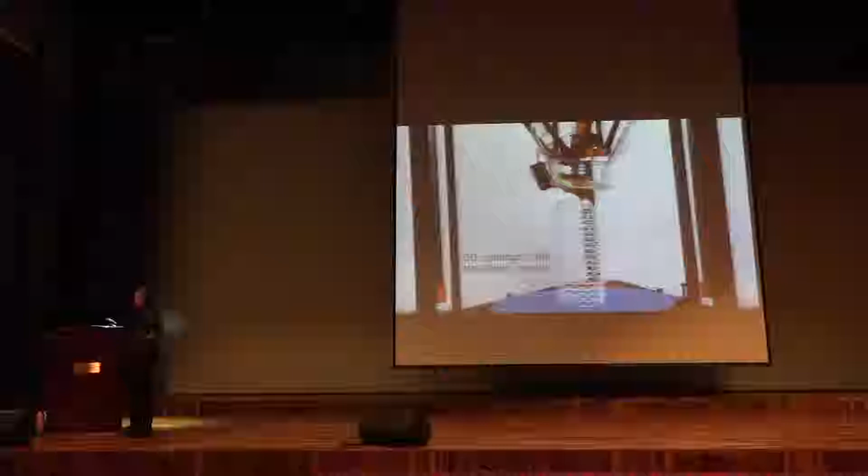All right, so here's a little teaser. This is one of the things I'll show you. We've been working on different software and hardware techniques that allow us to use 3D printers and laser cutters in more efficient ways. All right, there we go. And I need to push this button here. All right, so I'm actually kind of curious.

How many of you ever used a 3D printer? Okay, wow, great, that's like a third of you. Fantastic. So for those of you who haven't done this, it's very, very simple. Today, there's a good amount of machinery out there that allows you to make things under computer control.

A milling machine, a little more messy, used less often, is a subtractive tool, removes material. 3D printers are additive, so essentially it starts with zero and builds up the object. And laser cutters, kind of almost my favorite, also remove material, cutting it up into different parts.

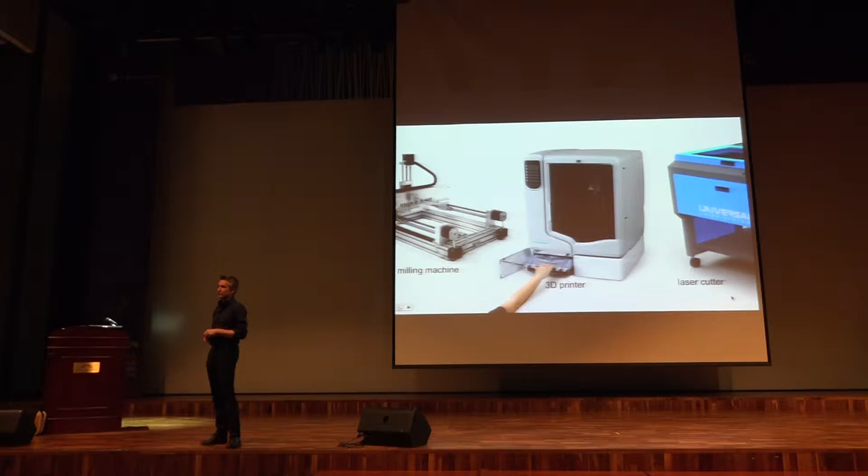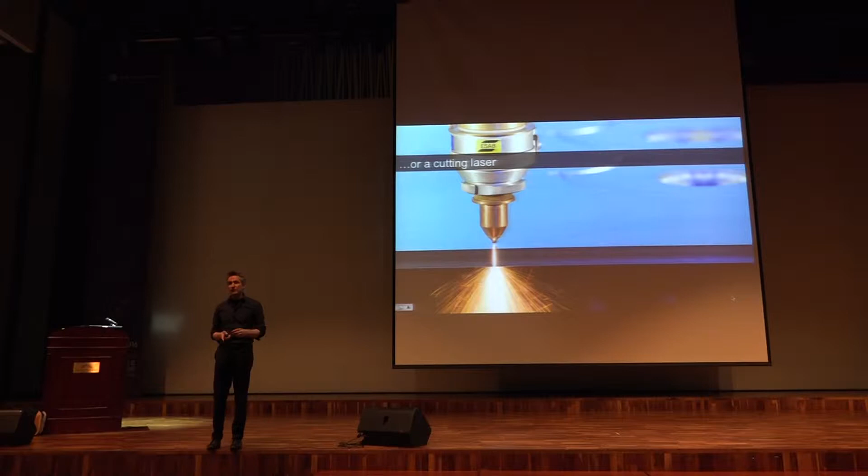If you think about how they implement it, there's a lot of different ways, but essentially you have some sort of robotic thing, like an XYZ table, some construction that allows you to place a tool in 3D space. Could look like this. And then at the end of this, you mount either a drill, called a milling machine, or a glue gun, kind of the same hot glue gun you maybe used in kindergarten, or a cutting laser, and then you've made a new fabrication tool. There's lots of other ways of implementing this as well.

So I think this is really going to change the world, and let me try to tell you why I think that is. Traditionally, when you're having a mechanical problem, you have a mechanical solution for it. So let me show you an example of how this works. I want to make a copy of something, and what I do is I get myself an analog copy machine. So let me show you an analog copy machine. I don't know if you ever did this, if you lost your keys. I certainly have.

So this is the actual original key that you have, and this is a blank key. It looks the same, but it does not have the pattern in the beard. So you put them both into the machine. Let me give you some sound of this thing. It sounds like this.

What happens now is this side here is sort of a scanner. You push this into the key, and at the same time you're cutting on the other side, getting a direct copy from one to the other. I'm sure if you're anything like me, you've lost a bunch of keys in your life. So this is a mechanical tool that creates a mechanical solution for a mechanical problem, but it's an analog solution, and it requires a highly specialized machine. All this thing does is copy keys, actually just a certain subset of keys.

Now, how this is changing today is we're moving to a digital model. So instead of directly making a copy, you actually first 3D scan the object, then you do everything you need to do digitally, and then you reprint it, and you get this out. You might have seen this type of process before.

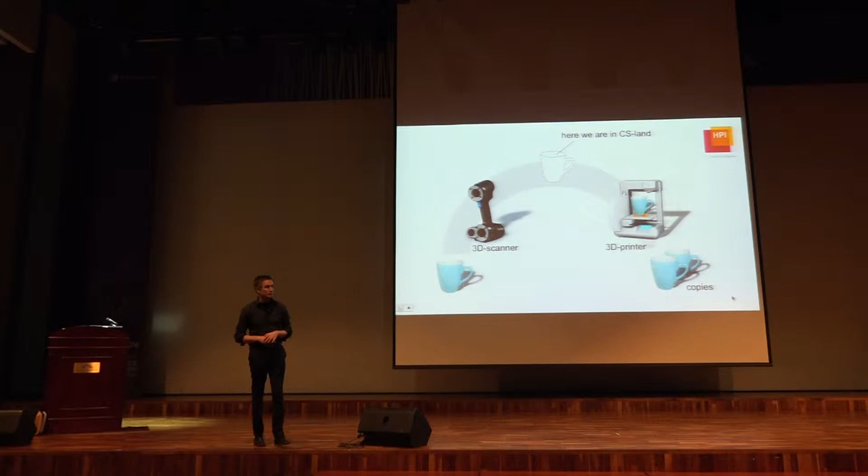Without this digital cup, I would have exactly what I had before. But this digital cup is very interesting because now we're in computer science land. This digital cup goes a long way, and we're going to talk about sharing on BitTorrent and all the things that can happen to the cup. So it enables completely new workflows.

Here's one example. One of the early adopters is the car industry. If you're a proud owner of a 1974 Volkswagen Golf, and if you happen to bump into that bumper—again, if you're anything like me, you damage the car periodically—you might want to get a replacement part of this thing. For Volkswagen, that's actually a difficult challenge.

They need to have that part available. So when you order the part, it's going to get shipped from a very remote location, maybe Wolfsburg, Germany. Someone's going to package this up and send it to you. And you're going to pay, I don't know, $150 or something for a piece of plastic. You're like, what? Why is this so expensive?

Well, the reason is that Volkswagen isn't interested—it's a lot of effort for them to maintain every single part of every single model they ever made. And this is actually one of the things where fabrication can come in.

Rather than holding on to these legacy parts and producing them in small quantities when you need them, you can actually just store the digital model and produce them on demand when you need them. Then in a slightly more distant future, this model could actually go to a fab lab close to you—rather than getting it from Wolfsburg, you could get it from the local fab lab in Seoul or wherever you are.

And in some even more distant future, this model could actually come to you. You have the 3D printer at home, the model is sent to you, and while you're still under the car fixing things, it actually 3D prints, and you can insert it into your car and finish things the same day for much less money. So it's one of the potentials, and the solution I just described to you is a classic database solution.

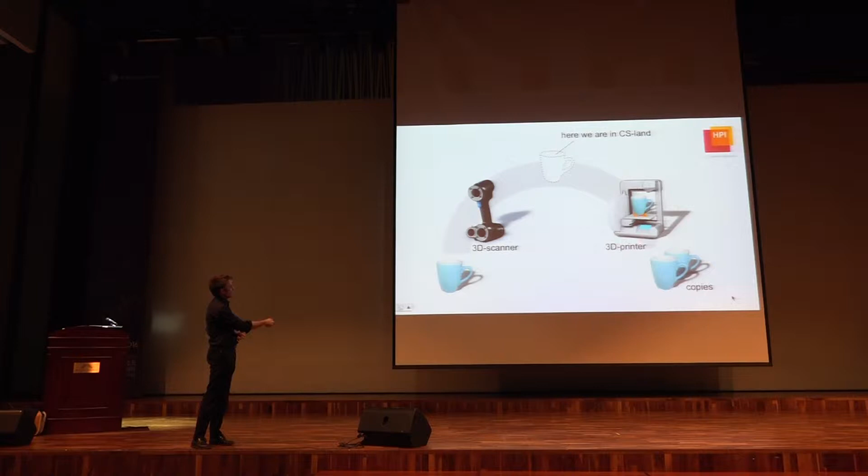Let me show you the pattern again. Here's this pattern: there's some sort of a scanner, and you've got a printer. You stick in an object, you convert it to digital, and then you convert it back to analog.

Let me show you this pattern in the past. You may remember this one. Desktop publishing became really big in the 80s. Before this, people would make layouts by actually using paper and paper clips, and when you're submitting something to a conference, they wanted a camera ready version. That's because there used to be a camera when they made that ready version of their talk. Today, obviously, there's no camera ready, there's no camera involved anymore, but it used to be.

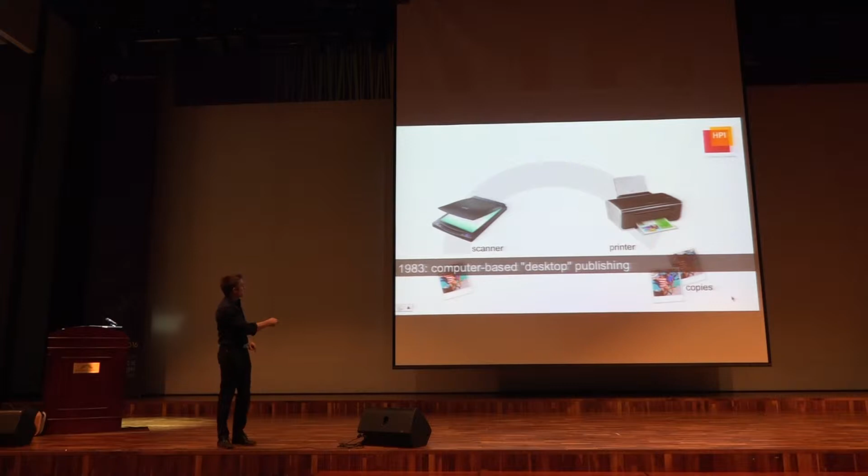At the time when scanners and printers were available, you could solve everything you needed to solve in computer science land. That's exactly what happens when you're submitting a publication to this venue here. I'm sure there was no camera involved in that after that.

Here's a different version of that pattern: music production. It was analog. You had an LP, maybe you still have some LPs, but it became all digital, and in between you had digital distribution. That's kind of why we have Apple the way we have it today. Apple became a media company because of this model. A lot of things changed.

One of my favorites: in the 1970s, a guy called Shoup at Xerox stole away time at night and did this. He used a tape recorder and ripped videotape onto a Xerox Alto, then they painted around in the picture, and wrote it back to the tape. People thought it was a tremendous waste of time. People threatened to fire him for wasting company property working on these things. But he actually got an Emmy Award years later because he invented video editing.

If you think back to when MTV actually had video clips, it created a whole new art form. And if you go further back, there are lots of instances of this pattern. You could even go back to interactive computer terminals. Before this, there was no interacting with computers. There was a way where you could type something in, and there was a printer on the other side, and somehow you closed the loop, and this made computer systems interactive.

So the pattern that we see in fabrication today, the presence of a printer and a matching scanner, is a pattern we've seen a lot in computer science, interactive computer science, and every single time we saw this pattern, big things happened. I think big things will happen again this time.

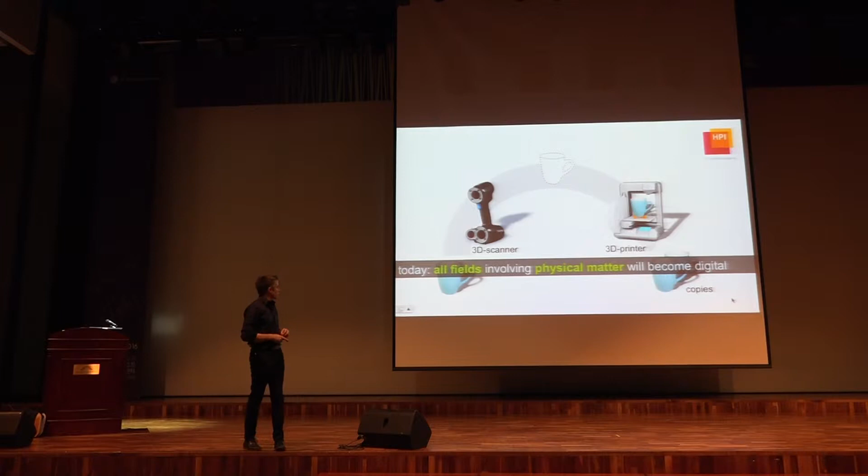What's interesting about 3D printing is it's certainly going to affect things. It's not just one field, it's all the fields that have to do with physical matter that are affected this way. Think of structural engineering, mechanical engineering—everyone who deals with physical matter today will be affected by this.

It's actually happening. Let me start with this one, I kind of like it. My student Stephanie dug up how many papers are submitted in HCI graphics conferences on this topic. This was until last year, and you can see there was nothing before 2011, and then the number of publications steadily ramped up. I was on the UIST program committee last time, and out of the 40 people on the committee, 6 said their primary interest is fabrication.

So it's really happening in a very big way. There's exponential growth in the maker scene. I like this web page here - they have 200 different 3D printer designs. Most of them are royalty free. You just look at the models, download them, and make your own 3D printer. A lot of things happening there - exponential growth in sales in 3D printing.

I think what's really interesting is that the industry is trying to address other people. So the first 3D printer I actually own is this one here, which cost $50,000. I guess that makes it something like 60 million won.

Then the next one I bought was a MakerBot for $3,000. Look at the huge price drop. This was intended for makers, so not professional users anymore, but people who just enjoy doing these things, hobbyists. Now there's a printer called Printrbot - this is the cheapest thing. I also don't necessarily recommend it, but it's interesting to see that this can still be done with less money than the previous ones. And so this raised the question if this could go out to consumers.

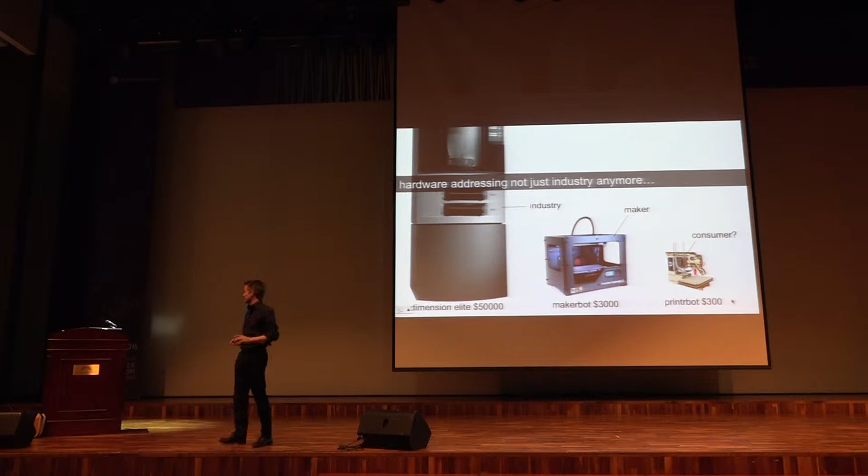So I think this is a great opportunity, and I think the great opportunity is to have millions of people make things.

So I think that's exciting because it depends on what people make. And I'm an engineer, and I would like them to engineer. I would like them to solve mechanical problems. I would like them to come together, make local adaptations of what they need for where they live, and I would like them to collaborate together in solving bigger problems.

I think there's good evidence in computer science where at the moment lots of, millions of people can work on the same problem together, that bigger problems are being solved. So this is something I'm really excited about.

I think the grand challenge is to let everyone solve mechanical problems, the same way that desktop publishing systems let everyone publish, and movie editing - I can edit movies on my cell phone today. I think we're going to see similar things for mechanical problems in the future. So now to get there, I think there's a bunch of different sub-challenges we have to solve.

There's still a lot of work in materials - I'm not going to talk about this today. I'm going to show a lot of work on interactivity. I think initially these machines were terrible batch processing systems. They still are - you work on them, you print them out, it doesn't work, you go back.

I think one of the key elements is adding domain knowledge when people want to make smart things. I don't know about you, but I know very little about desktop publishing, but I like the fact that I have a desktop publishing software that shows me how to do things. So that's very powerful - that's the key idea of a software system, that what you're lacking in skill, what I'm lacking in skill, the software system can actually add to us.

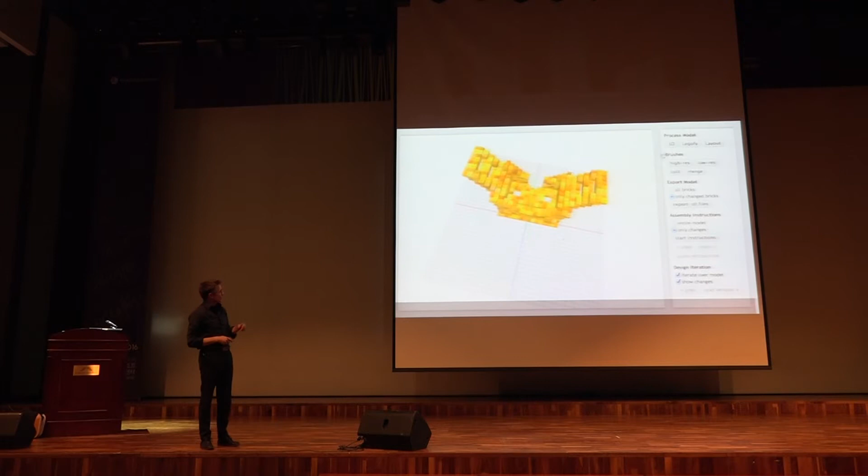So let me show you how this works. I load my 3D model into the Fabricator software and say Legofy, and it makes Legos out of them. In this case, I just want to check the optical path—this is a VR headset, and I want to make sure the lenses are in the right location. So I go back in and tell these areas around the lenses that they should be 3D printed, and everything else I'm okay with having in Legos.

So I export this as an STL file—that's the standard, terrible standard format for 3D printing. While one part is printing, I can sit down and actually assemble the rest of this thing. And when it's done, I've got my 3D printed parts—they fit in perfectly into the Lego setup. I pop them in, and I can start trying this out. It looks a little funny.

We're all going to wear these things in the future, believe me. All right, so I can continue to operate.

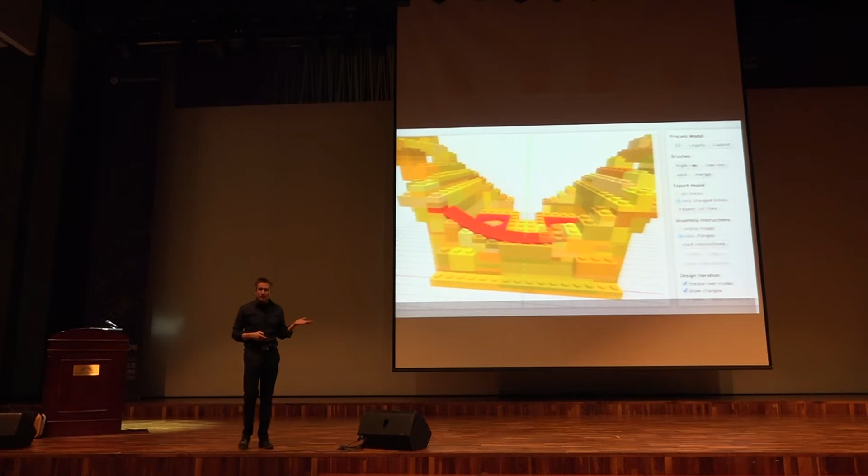Lego is highly modular, and as a designer, I would like a modular design. So now I can adjust the headpiece and so on, and it can go through my process a bunch of times. When I'm all done, I'm going to 3D print the whole thing, and I've saved a lot of time. I should update this.

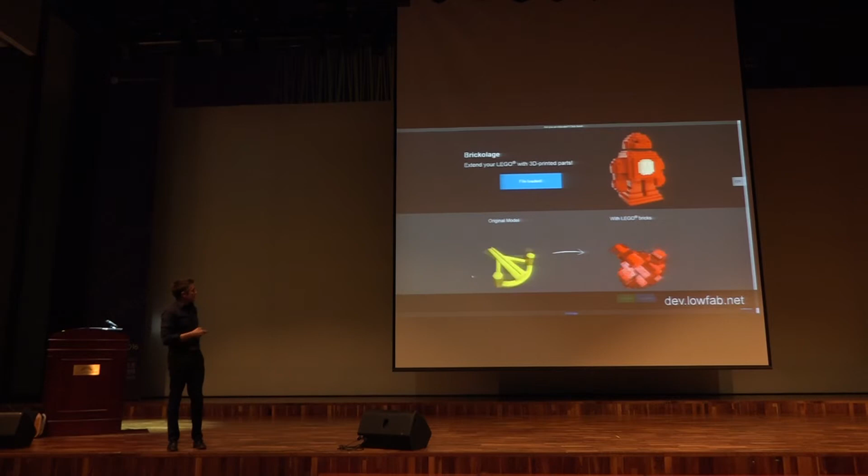We actually created a webpage called brickify.it. If you're interested, you can check this out. You can drop your own STL files in there, it converts them for you, and you can try out this process. In the software, you can tell the system what parts of the model you'd like to be Legos, and which parts you're happy with being 3D printed.

Legos were great because they were very modular. We also talked to the Stanford Teachers Association about using these in class, or in high school. Kids are very familiar with Legos, and it seemed like a really good approach.

But there were other applications where Legos didn't seem to fit that well, and one of them was ergonomic testing. If you're working for a company that makes a grip, like this old Logitech presenter, the size and shape of the grip is really important. These things are very carefully designed, for example, at companies like OXO.

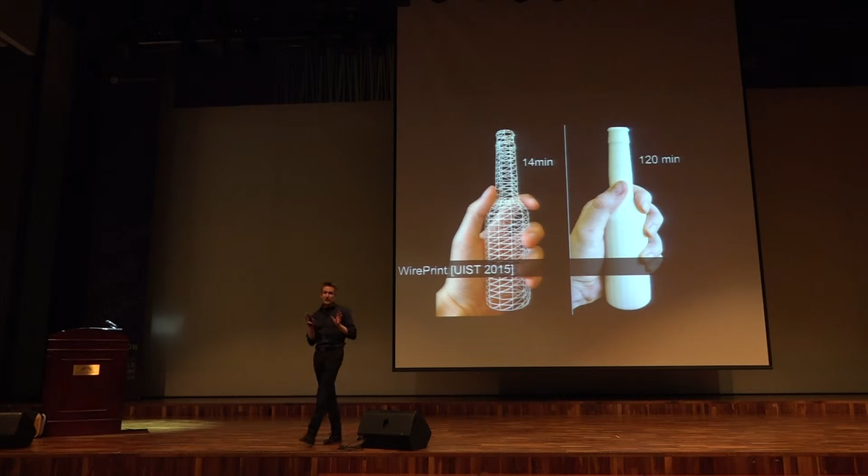So we wanted to have a low-fab version that actually captured more of the essence of the shape. This is what I showed you earlier, called WirePrint. Again, it's the same method as before. You can go in and say which parts of this you'd like to have high fidelity fabricated. In this case, this is a piece of a bunny. I can say I want this to be high fidelity and everything else low fidelity, and again I'm getting a speedup of something like a factor of 10.

Not quite that fast yet.

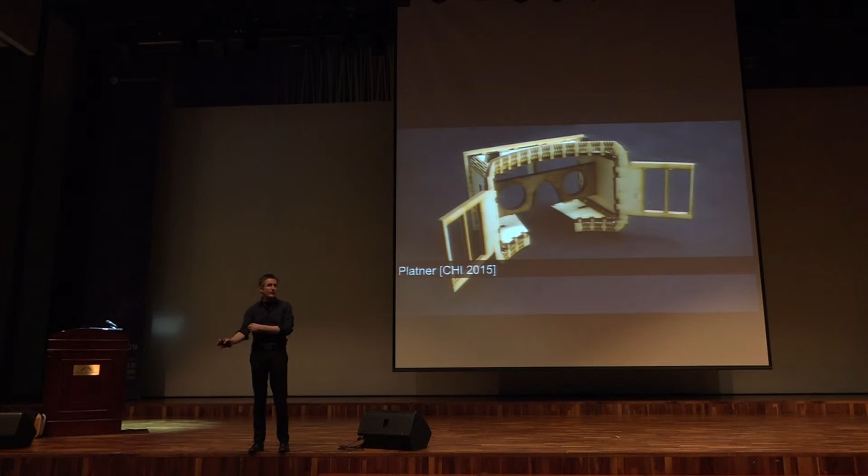The last version we showed at the last CHI is called Platner, because we're replacing the contents with little plates. This is a 3D model designed for fabrication with a 3D printer. We thought maybe we can convert this to a laser cutter, which fabricates way, way faster. Here's the same model converted in a bunch of different ways. The actual model itself takes 16 hours to print, and all these other versions are different types of low fidelity versions of that headset.

Let me show you that. Same process as before: you can mark up what parts you want high fidelity, and the rest is converted to these laser-cut plates. So that was the idea of low fidelity fabrication.

What we got out was a technique for 3D printing that got us up to the minute range. So you could work with 3D print and quickly fabricate a little test run, see if it fits your hand well, ergonomics, whatever you wanted to test, and then iterate quickly. Rather than a single process taking a week where you print Monday, Tuesday, Wednesday, Thursday, you would print 5, 6, 7 times in a day, and then overnight print for the customer and be done.

So we wanted to push this further, and the next thing we wondered: can we get the interactive rate up to like a second range? What would that be like?

If you believe in my analogy earlier, we wanted to transition from batch systems to the command line. We're still like in the 60s, right? But rather than sending out a batch of punch cards, we wanted to interact with the system multiple times a minute. So here's a system we built called Constructable. That's my student Stephanie, who is actually involved in a lot of the wonderful work.

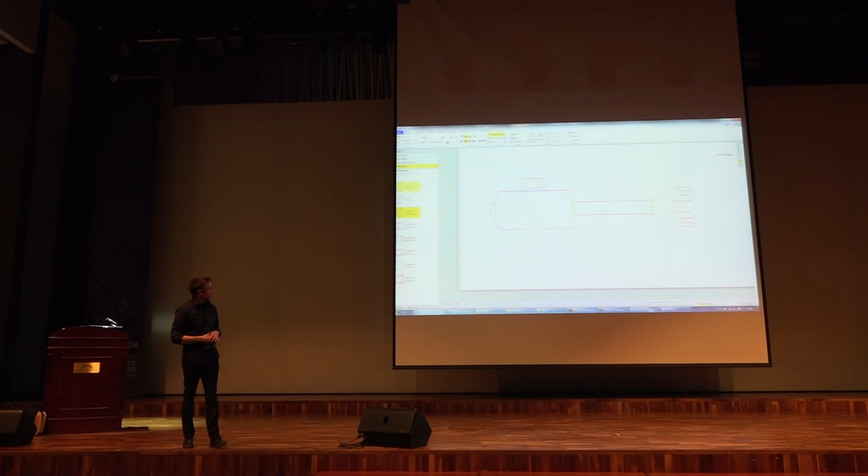Let me show you one more example, just because I think it's fun to watch. This is a little plant holder, and you can see the little arms in here - these are the arms that we're going to bend in a second. So we're defocusing the laser, and now the laser goes around and heats up all these different things.

Took us a long time to optimize that to actually work reliably. So now we're done with this piece - we're moving back up, we're cutting it out. I really like this part because now it's actually dropping down. I think it's very satisfying to have the workpiece kind of fall out of the machine.

And here's Stephanie assembling this. And just to show that we're still computer scientists, she used a computer cable to mount this here.